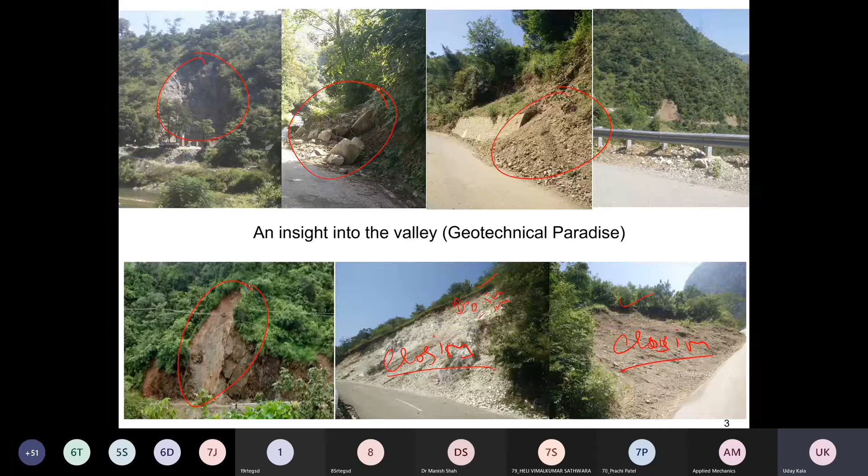So looking into the requirement of understanding all this, when we talk about landslides, it's typically defined as earth material moving down the slope, or moving out of the slope. Landslide is one of the disasters, and when you look into the disaster aspect, it claims life, and it also involves huge amounts of money spent only on managing landslides, not exactly mitigating them. As per the data we got from NIDM from 2016, there should be a new report coming out very soon.

So let us see if we have dealt with landslides better in the last 5 years or so.

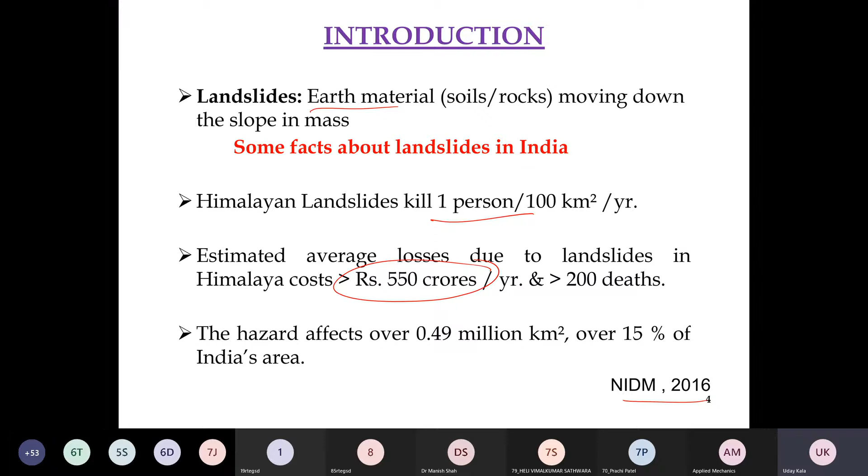When we look into landslide classification, as we were discussing, we need to look at the different types of material which is flowing out. It can be rock, debris, a combination of coarse grained soils, and sometimes, in a few countries worldwide, fine grained soils or clay type soils which tend to slide or come out of the soil mass.

Depending on the material, different movements are associated with it. Normally rock tends to have rock fall and topple, whereas debris type of soils are expected to slide, and in conditions of more water content or moisture, they may also have a small spread. Fine grained soils mostly tend to have these two types of flows: spread and flow.

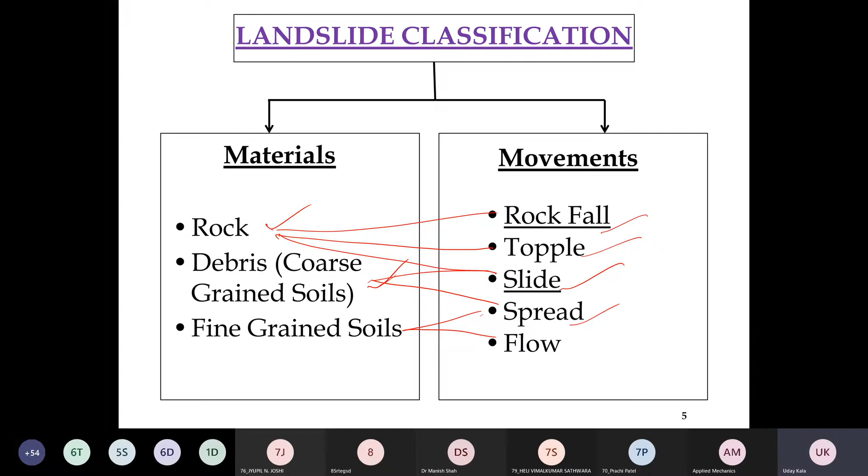So now we can understand that different types of material provide different types of movements. Based on these movements, we can understand what to expect from this particular disaster, which is termed as landslides. So when you look into the classification of material and movements, the major component that comes into this is something called risk mitigation.

Can we mitigate the problem of landslides? Yes, we can, and we have been doing it. What are the options we have? Number one is structural measures, where we construct a good amount of structures - I'll define this slightly later. And the second is non-structural measures.

Now what does this non-structural measures mean? Non-structural measures are like giving you a sort of warning, maybe slightly before the event.

If we don't talk exactly about landslide disaster risk reduction, but about flood disaster risk reduction, which has been wonderfully brought into practice by India's National Disaster Management Authority - when we talk about floods, it's very difficult to talk about structural mitigation corresponding to such disasters. However, there are a lot of non-structural measures which have been very evident, and we've seen good success case studies from 2018 in Orissa, 2019 in West Bengal, and also 2020 in West Bengal, showing a very good approach towards risk reduction in floods.

So what do you mean by non-structural measures? It is watching, observing, predicting, and then warning. Accordingly, we go for risk reduction methods such as moving people, where we don't involve any major structural intervention related to disaster risk reduction.

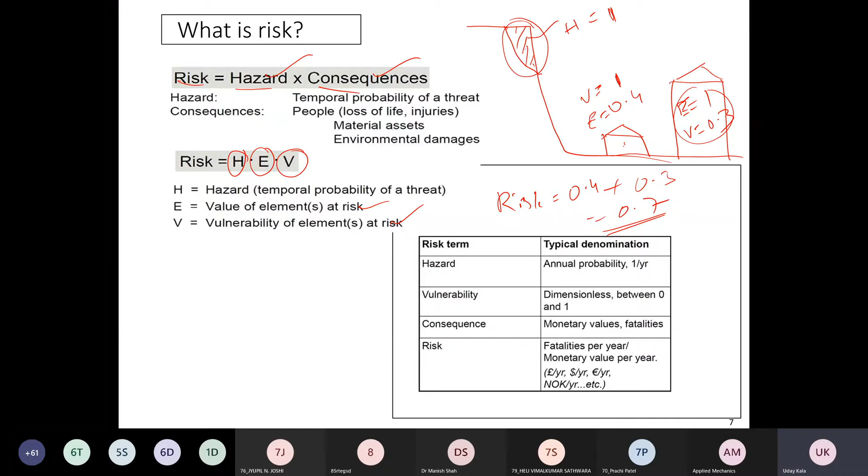For your information, the same risk approach is also used for looking into the current situation which is going on, COVID. In COVID also they do risk analysis and try to see how this risk can be mitigated, what is the vulnerability and what are the elements of value at risk. That's what you have probably been going through in the newspapers if you have been following them for almost a year now.

So when we look into the options we have in risk management, first you have to establish risk: what is the amount of risk we have in the process? Then we identify what the risk is. For example, I just told you there is a landslide happening and it is going to fall. Risk analysis, yes, we have done. We found there are 2 settlements and accordingly the risk is 0.7, from the earlier example. Now I'm going to evaluate the risk, how much of this 0.7 is going to be workable.

For example, if there is a rock or soil, what type of expectations can I have, and how can this risk be evaluated? If the small settlement is something like an industry, then the time of people being in this particular industry is time controlled. We are going to have a high amount of staff in the working hours, probably in the morning, whereas at night the number of people in this particular industry can be less.

Whereas it's going to be the reverse when we talk about a settlement or house accommodation with respect to the risk. So we evaluate what type of risk we are talking about, and then look into the options we have for risk treatment. When doing all this, the major parameters we require are monitoring, and communication and consultation: how to take into account risk identification and how the risk treatment will be done. Then again we establish a context for how the risk treatment is going to get done, and identify what can be the risk after the treatment.

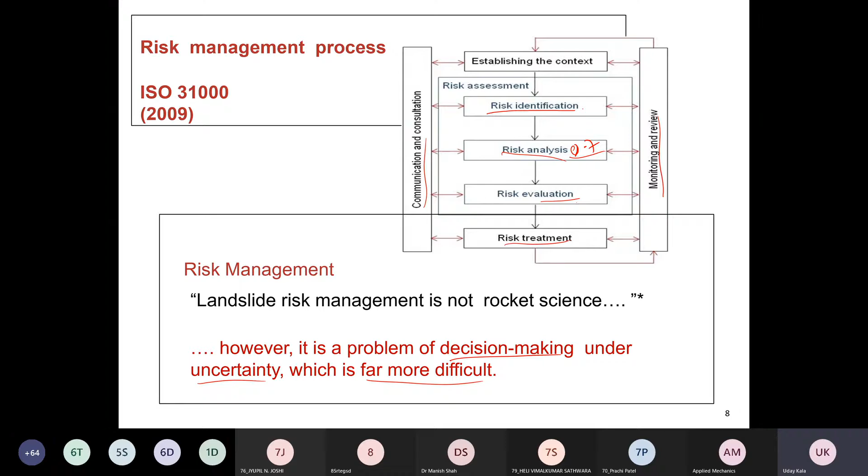It's not that if you construct a retaining wall, it's going to stop or control the situation at that particular point. Again, it will lead to another risk. So we do a cyclic assessment of risk, and try to understand how the decision can be made in terms of uncertainty, which is far more difficult. If you include more uncertainty, the problem is going to be higher. That's how we approach risk assessment or risk management associated with landslides here. As I told you, it can be used for any type of disaster, including earthquakes or the biological disaster currently going on, COVID.

Then the major factors we need to look out for in risk management are: first, what can cause harm, the problem associated with the hazard; then what is the probability, how often, the frequency of this problem; then if it happens, what can go wrong; how bad are the consequences; and what should be done. If you look into these 5 questions on COVID, I'm sure we have a lot of understanding.

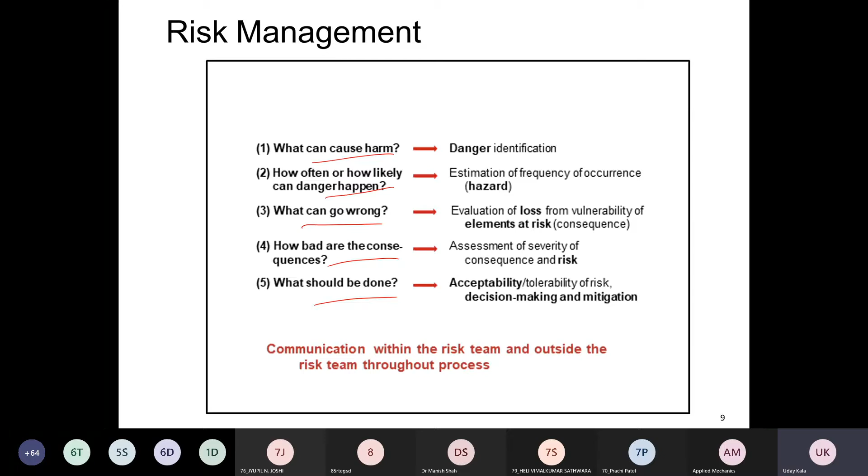Now, if I tell you that the structural mitigation for COVID is vaccination, till date we have been following non-structural mitigation: safe distancing, masks, sanitizing and so on. That's how we can differentiate structural and non-structural mitigation associated with any particular risk. Now, what are the various points again? How can we assess or quantify the risk? Then the question comes in. Yes, we have different types of methods by which we can compute the hazard.

I'm sure all of you should be doing different types of analysis. If you are coming from earthquake, if you are looking at some disaster landslides, or if you are looking for settlement of your buildings, etc., we have a huge number of works, equations, or methods by which we approach understanding the hazard.

So in this, there are heuristic methods which are mostly taken up by the local site, local problems or local information. Then statistical methods: we will try to find out different methods by which we will try to understand the data, the problems associated, or the numbers associated with the hazard, and we are going to go for some statistical analysis.

These days a lot of probabilistic methods are into the picture. I'm sure if you are looking into work published by most researchers, at least from India and other areas, especially in the lines of disaster, we talk more about reliability methods. And in reliability analysis we have different types of methods like first order second moment, first order reliability method, second order reliability method.

So we are going to have different types of methods by which we can understand the reliability, followed by another very common simulation, which is Monte Carlo simulation. Then depending upon the type of problems we have, either we go for point estimation or we go for event tree analysis for computation of different types of hazard.

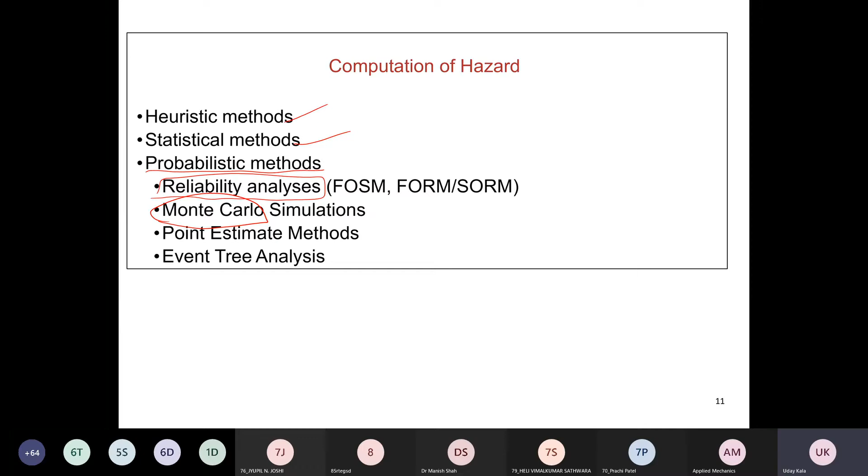And these methods which I'm listing out are more famous or more workable in landslide related problems. So it can differ with the different types of hazards or different types of problems you are looking at in your own areas.

Then qualitative risk analysis, as we have been discussing, is going to be simple. First, we are going to take a very typical understanding by using qualitative methods. So we are going to have different types of methods, either using a 4x4 matrix or 4x6 matrix or 7x7 matrix, or simply a 3x3 matrix, which I'll try to explain in the given time we have.

So when we talk about qualitative risk, as we told, risk is a combination of hazard and consequence. So I'm going to have two scales, hazard and consequence, because they are multiplied, hazard into consequence. We are going to divide the happening of a hazard and the consequence associated with it into three simple scales.

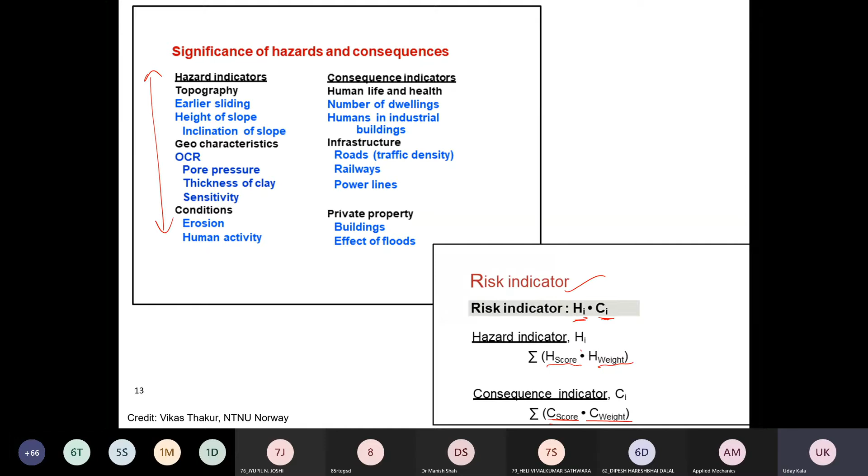So like this, we need to cut the concept of hazard and indicator into different factors. This particular case study comes from Norway, from one of my collaborators, Dr. Vikas Thakur. I took most of this data from him. So I'm just trying to give you a small idea about how they did this in Norway, in one of the regions, where we are going to talk a little about risk analysis.

For example, when I talk about the chance of an earlier landslide happening, I'll give a weightage of 1, because wherever landslides keep on happening, the chance of a landslide in that particular location can be comparatively low. So I don't give more weightage for it. But when I have a triggering factor like pore pressure, or if the area has been cut for any road or housing development, it is going to give a worsening effect. That is why I'm going for a high weightage.

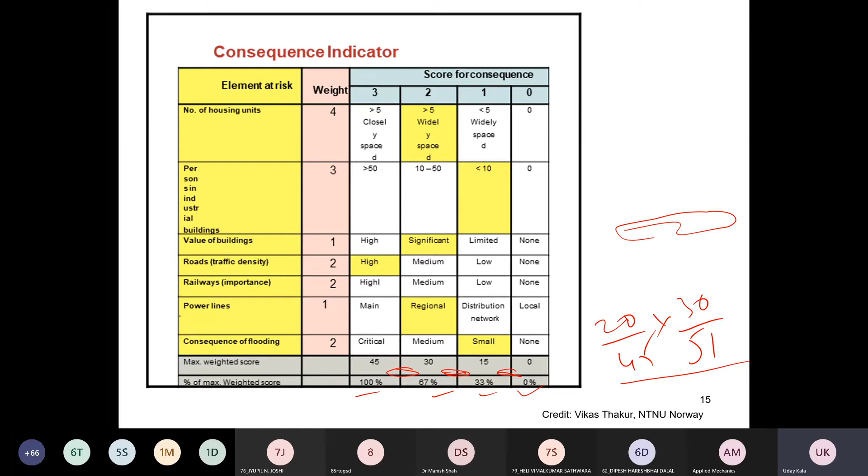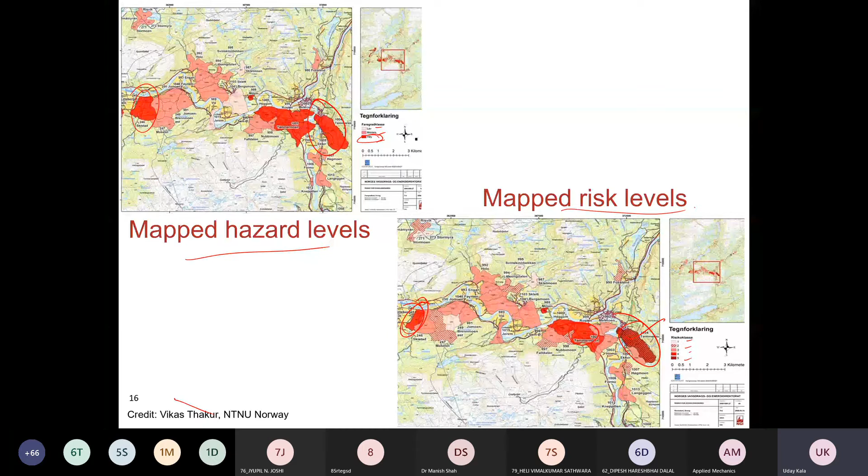So for example, I'll construct some retaining wall, or I'll try to go for some risk mitigation method, some structural method, and then I will try to make the people aware that there is a chance of a hazard happening here, and I will try to reduce the consequence associated with this particular problem. It can be done by using this.

The second is, okay, I will not go for any structural mitigation, but I will evacuate the total place, and I will reduce the risk by removing all the elements of risk, and I'll try to reduce the risk associated with the problem. For example, sorry, I don't have much space here. I'll just try to do the same here. I'll take the same problem we tried to solve.

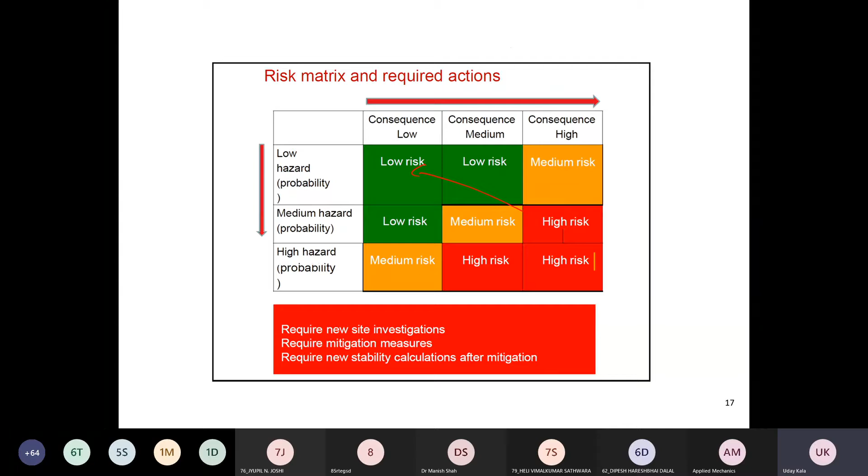Looking again at the risk mitigation aspects of this problem, as we discussed, we have structural measures and non-structural measures. I'll explain structural measures in the next slide, but let me talk about the non-structural measures. There are three different scales at which we can apply non-structural measures. The first is by having a regional threshold. For example, in a region we expect the rainfall to be constant, so if rainfall crosses a particular threshold, there is a good chance of a landslide in this area. Then I can give you the landslide rainfall approach.

In the second option, with zones, it's very difficult because a rainfall area is going to be huge. So when I want to come to a smaller extent, I will go for data-driven models, collecting data from the site to see the chance of hazard in this particular zone. I'll do hazard zonation, and this can be done using different data-driven models.

And lastly, for local measurement, if I have one particular site which is very dangerous or very prone to hazard, then I'll go for field scale monitoring, with monitoring methods developed or employed in that particular place. Whatever information we get from it, we use to monitor the slopes. All these aspects come under monitoring, and by using monitoring we approach a non-structural measure, so we are not going for any typical structural measures.

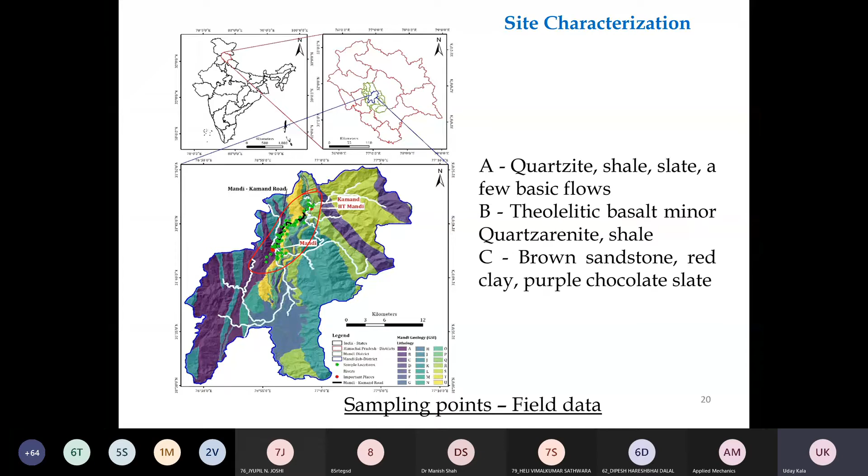What are the different types of geology in this particular area? From all the locations, we try to get all the geotechnical parameters, which we normally do in our lab on a day-to-day basis, including particle size distribution, gradation, general characteristics, and Atterberg limits.

Then I look at parameters such as saturated density, gamma, OMC (optimum moisture content), and saturated moisture content in the soils, which gives us an idea how the soil behaves with respect to saturation, because all the landslides happening in this location fall into the category called rainfall induced landslides, which happen more during the rainfall period. That is why moisture content plays a major important role here.

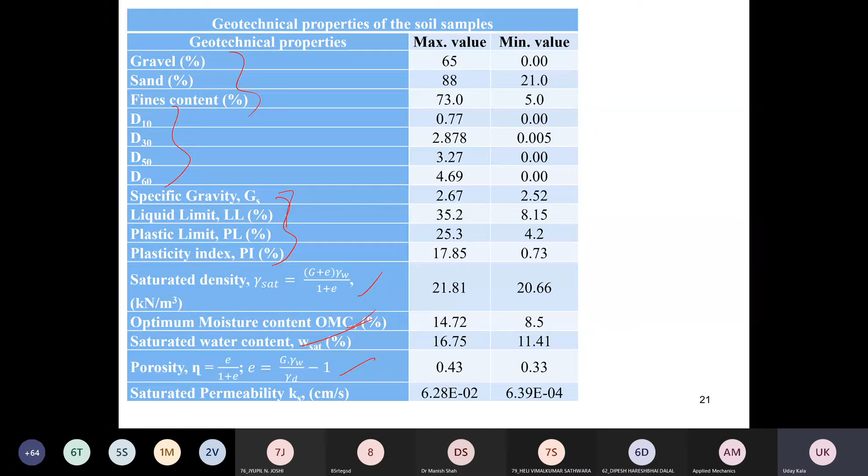Then there's the proportion of the soil, porosity, then permeability - how fast or how slow the water is moving in this particular zone, so that when there is rainfall, I know what to expect from this particular slope.

Apart from this, we also collected a lot of information from the field, which includes field moisture content, slope angle, elevation. Angle of internal friction and cohesion are not measured in the field, but we collected the data from the field and did the test in the lab, direct shear test, to get these values of cohesion and internal friction.

When we collected these parameters from 82 locations with 22 parameters, out of which in 2019 there were only 58 landslides and 24 no-landslide sites, it became very difficult to use any simple logistic or statistical method to get an understanding from such high-dimensional data - 82 locations and 22 parameters - to understand the intrinsic parameters.

That is why we tried to use machine learning here in order to understand what factors correspond to the failure of slopes in this particular area, which is Mandi.

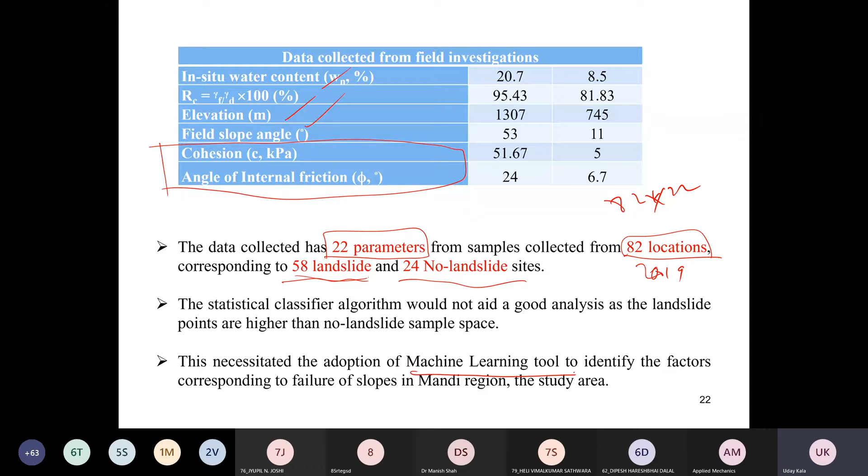For these failures, as I told you, we have both data - landslide and no-landslide locations from 82 locations - and from each location we collected all the information: geological, geotechnical and hydrogeotechnical parameters required for ascertaining what parameters indicate a slope failure.

For this we made a machine learning program in which we divided the factors into training and testing. Most of the time training goes to 70%, whereas testing goes to 30%, and then all this training goes through typical models existing in machine learning, or sometimes we may have to go for ensemble methods depending on the variations, or depending on whether it's a multivariate or univariate type of problem we are trying to solve.

Then we identify a technique, test it, and validate the method, and this validation can now include ranking of these parameters. Then we choose, based on the machine learning, what the various contributing factors are, out of the 22 we considered.

For example, if I take 22 parameters from here, after doing all this analysis, probably I can narrow it down to 5 or 6 parameters which are most contributing. These parameters can then give us a good idea about ascertaining the happening of a landslide in a location.

However, as we discussed, we have a lot of issues in understanding probability as well as errors associated with these particular problems, which we are also going to take care of as part of this analysis.

So for doing this, we use this type of analysis where we use TP, FP - true positive, false positive, true negative and false negative. Again, if you've been following news regarding COVID, you would have seen the same parameters used, how the reliability of testing can be checked using these particular parameters.

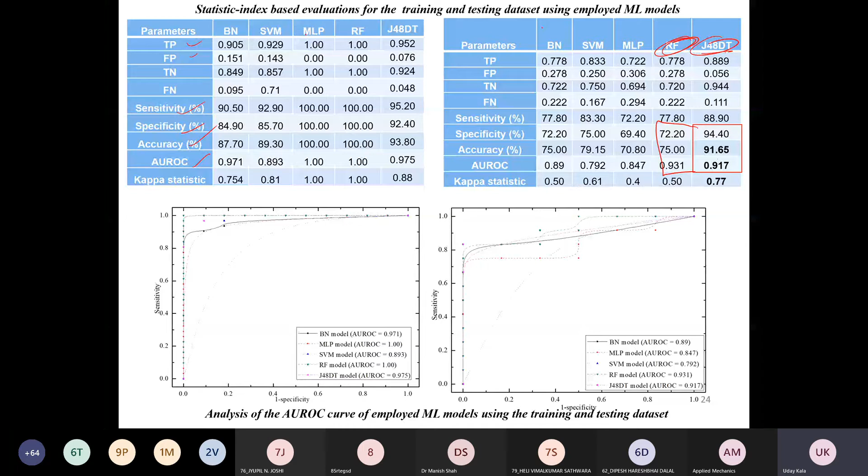So looking at this, we did the same grading analysis. We try to take all the parameters and classify them with respect to the landslide problem, where we have 58 landslide locations and 24 non-landslide locations. Based on this, we try to differentiate the problem with respect to different conditions, and we do something called correlation feature selection method. By using this analysis, we can find the ranking associated with each parameter on the happening of a failure.

We define the happening of a failure as 1 and a non-failure as 0, and we try to get the parameters and see what is the contribution of each parameter in order to get an outcome of either 1 or 0. So then we understood that relative compaction and porosity are giving us a good amount of correlation, whereas the other parameters - field moisture content, permeability and angle of internal friction - are giving us rank 1, 2, 3, 4, 5 comparatively.

So all the ranks, the serial numbers, can also be talked about as rank. The highest rank is obtained by relative compaction, followed by porosity, then field moisture content, permeability, and angle of internal friction. After this, the variation has been found to be very high, so we can say that the first 5 parameters are among the most important or most indicating parameters.

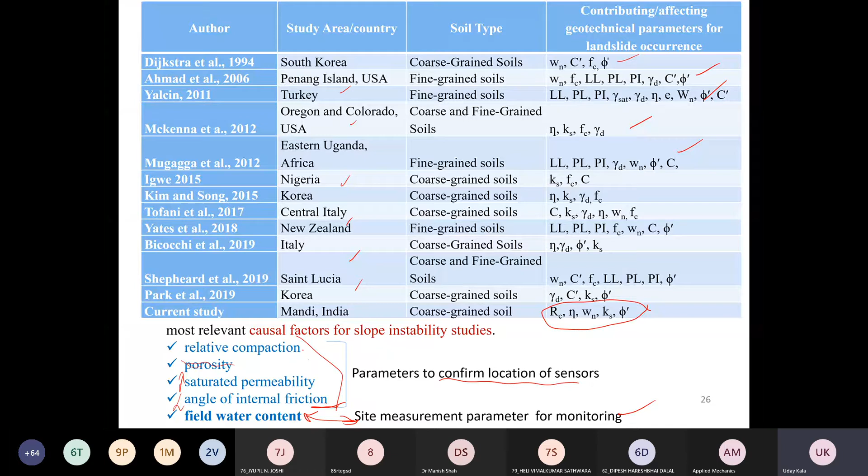So based on this, we can develop a method. Sorry, just a minute. I'm sorry, there is a landline call, so I cannot stop it. Sorry for the break, continuing on the same.

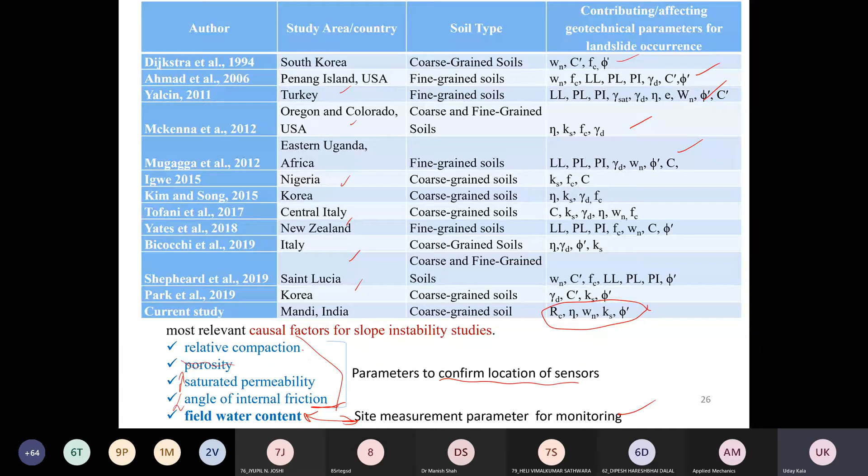So we fixed these particular parameters, and then we went ahead. Now the major point we needed for measuring or doing the monitoring, we could understand from this particular study by using machine learning.

This is the same slide we talked about. When we looked into this, we came to the point that soil moisture is one of the major components which we need to measure at the particular location for understanding the susceptibility of landslides.

As I told you, all these landslides happened majorly during rainfall due to the intensity of rainfall. So we have our own rain gauge, as part of our sensing, which is also MEMS based.

Apart from this, we have to confirm, because at a point of time when we call it a landslide, the first parameter or the first definition itself says we need to talk about a movement which is happening in this particular location, measured like an accelerometer.

And then we are going to have a force sensor, which is going to talk about impending moisture increasing in the soil after a particular level.

Then we are going to also include environment parameters, like temperature, humidity, and light sensor, which are going to give us an idea about what can be expected after a particular rainfall incident in that location.

And as we can see, we collect all the information and try to load it into a cloud, based on a GSM module. So you can see a combination of all this.

Few of these, for example light sensors, accelerometer sensor, and GSM - these are the same things which we have lifted up from the smartphone. Also the force sensor, which you also have in the screen, most screens.

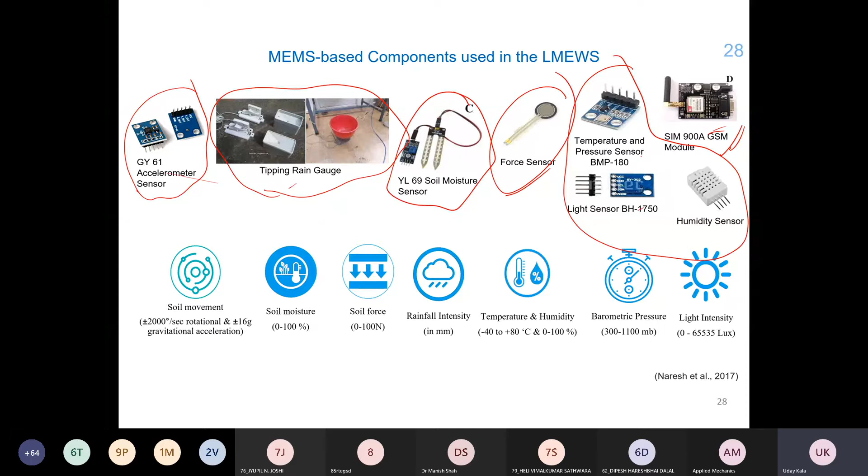But however, it is not very sure that when you select this method and these components, they are going to work. So what we did initially was go for some training of these particular sensors. We needed to train them for different understanding.

For example, this is the setup used for training the moisture content by using soil moisture sensors. We packed all the soil in a particular box, then tried to place all our sensors, and lifted the ramp so that the soil slides.

And when the soil is sliding, we observed that most of our accelerometers, which give us values of displacement, started giving us some information initially. So we understood that most of these particular sensors we are taking up are trying to give us an idea about a movement happening inside a small box.

Which looks something like this - you can see a lot of wires and monitoring happening inside our area when we are trying to do the same with the soil, which we are trying to move as part of this particular experiment.

And this experiment and the combination of these parameters - we immediately filed a patent somewhere in 2018. This patent is currently under examination, and we are expecting this to come through soon.

However, the way the sensors work and the various parameters we are trying to judge as part of this whole exercise is already published. I'll share with you the list of publications at the end of this work.

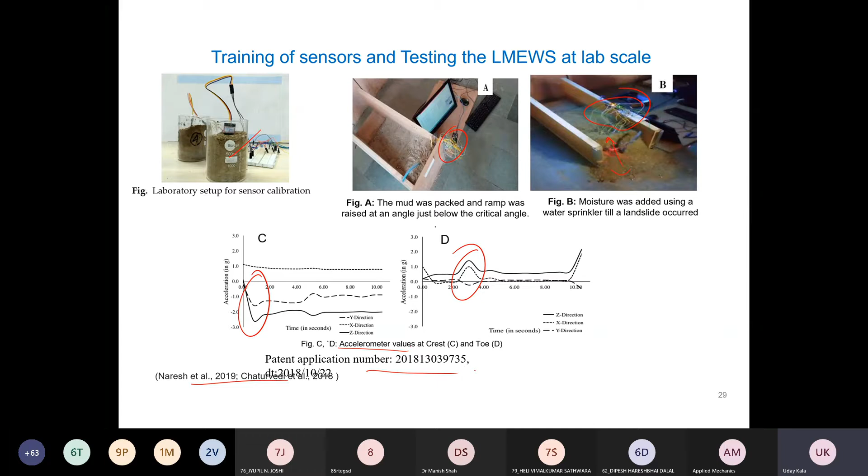So if at all you want to take up how to do all this calibration and testing of these particular parameters, then we have accelerometer. So this accelerometer is the same again which you have in your mobile, which helps you to find the direction as well as the movement.

For example, when you are probably looking into taxi related apps like Ola or Uber, they tell you how far your driver is and which way you are moving, whether their movement is going fine, or whether you are moving in the same direction of where you have to reach. The same thing happens in your Google Maps, or if you use any tracking device. So we use the same sensor.

So for that, the major component is here. As we are getting accelerations, we want to convert it into displacement as well as velocity. We know single integration of acceleration gives us velocity and double integration gives us displacement. So we used a time scale. This is the amount of time, that is 1 millisecond. 1 millisecond is the time which is used for getting the data from the accelerometer.

So we take the same time interval and we calculate the displacement from the formula ut plus half at square. That is the kinematic equation, and the time period here, as I told you, will be limited to 1 millisecond, and accordingly we will get the displacement corresponding to the value of accelerations which the sensor is noting over the time.

Okay, then based on these displacements, we are going to stack up the displacements, and then we are going to calculate the z-score depending on the amount of displacement happening and the mean and standard deviation of these movements over the time. And this we do across all three directions, that is x, y, and z. Depending on these movements, we look into the z-score, and these movements are classified into small, medium, and large.

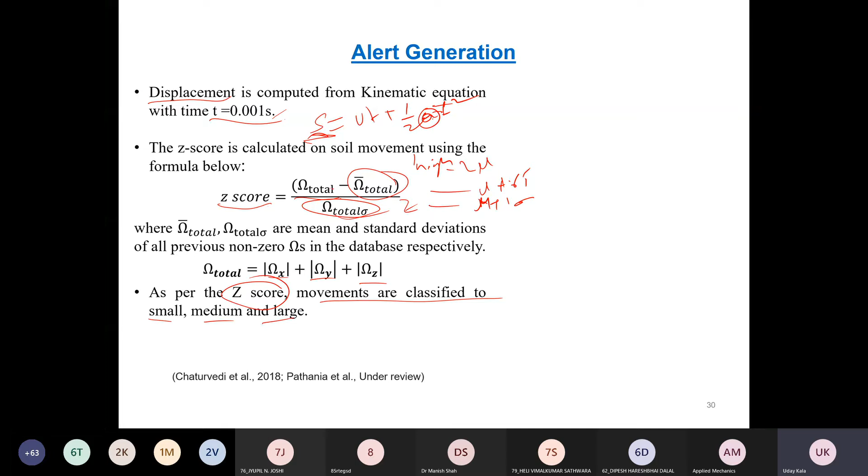So we give an interval: when the z-score is near to 1, mu plus 1 sigma, then we call it low. Mu plus 1.65 sigma, we call it medium. And when it talks about 2 mu, then we talk about this being very high. So we try to classify these movements, and then depending on the movements, we can raise alerts, which look something like this. You can see data collected over a period of about 1 hour.

So there are small movements happening over the time, and they keep accumulating. If they continue, they are going to slowly breach one level after the other which we have kept, and these movements at a particular location, Balianala 2, are going to convert into moderate movements. Similarly, the moderate movements keep happening over the time, and they again try to convert into high.

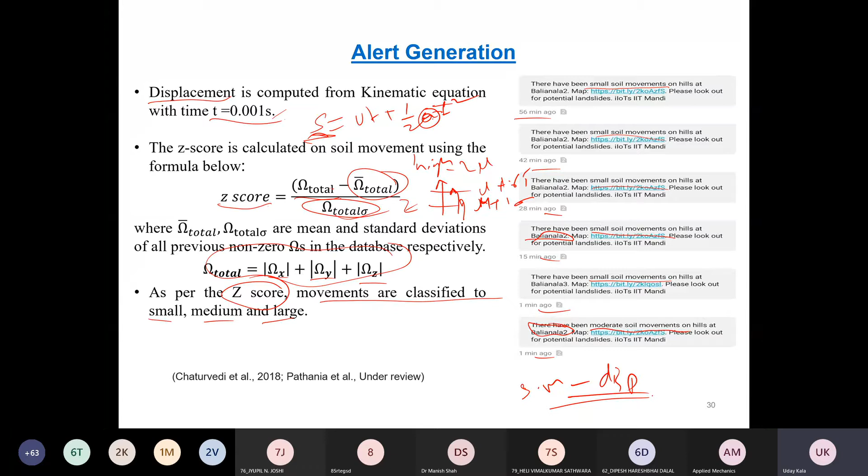Now, when the rainfall is stopped, then depending on the ambient temperature and heat conditions, the soil again gets dried and the moisture falls, and slowly we can see the movements also keep decreasing. So we have been maintaining the data on soil moisture and displacement over the time. Now we are seeing how these values on soil moisture and displacement can be useful for thresholding for a given slide or movement happening in the soil.

And this keeps on happening every 10 minutes, in which we are collecting the data from various locations where the sensors are already placed. So we have again filed a patent on this particular framework, and the same has been extended to an international patent. Again, both the patents are in the examination stage. We are expecting them to be granted soon.

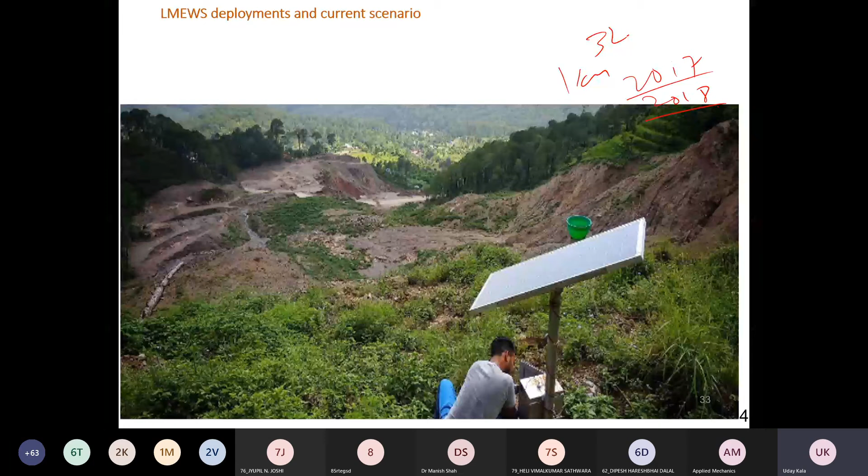After 2017, we have been working on this area. As I told you, in 2018 we started having our work going on properly. We also filed patents, so we could show some initial success of our sensors to the district administration, and we could take this opportunity of going to this slide. Normally, when a slide happens, in the coming rainfall there will be subsequent slides in this location. So we got permission from the district administration, and we installed our sensors at the given locations to check if there is any movement happening in this place.

So our sensor box, from the white boxes I showed you, has now become more formal, looking like this, where all our units are present inside, whereas the sensors which are needed, like the soil moisture sensor and acceleration sensors, are all present inside this particular box, and our rain gauge is on the extended stem, and all our sensors are powered by solar panels, which look something like this.

So our sensors currently are at the surface location, so our sensors go only 1 foot or half a meter deep into the soil. Currently we have started doing subsurface monitoring.

Currently we are restricting our work only to the top soil, or the surface level of the soil, because in a landslide, whenever there is a mass landslide happening, there is a good chance that the surface slides similarly with the point at which the slide is also happening, or the surface displacements are comparatively higher than the displacements happening exactly at the failure zone.

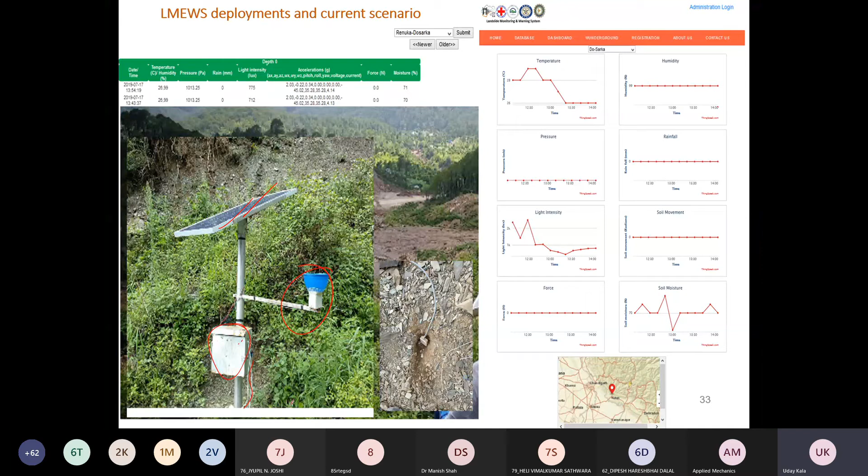Okay, so our data is captured. I just showed you a glimpse of how the data looks, and you can also get the same data in graphic scale, where you can understand the difference happening at the site location. Based on this, we have developed a landslide monitoring system, and along with the system, we have also connected it to an alarm system very near to the road by which this slide was passing.

This system is now very low cost because of the MEMS sensors we are using, hardly costing a few thousand rupees, whereas the total technology, including the solar panel and all, comes to 50,000 to 60,000 rupees, depending on the type of parameters we are trying to estimate at a given location. Whereas the conventional systems, like a tilt meter or an extensometer, cost you somewhere in lakhs and crores of rupees.

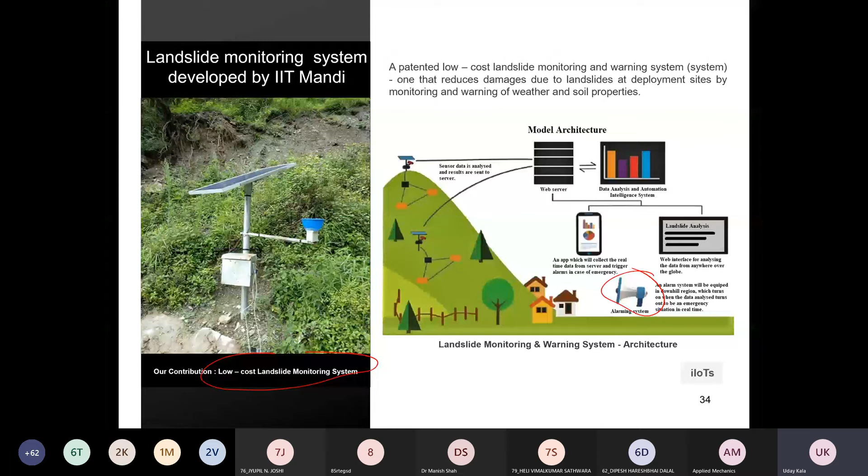So that's a major development we made, and all our work is patented, and we can give you data monitoring, or we can give you all the data in real time. We also have alarming poles, a warning pole at the slide, where we monitor the slide using wireless communications, and we are going to have hooters and blinkers at the alarm system at the site in order to control any movement of vehicles on that particular road. We are also going to give movement alerts based on the type of measurements we have.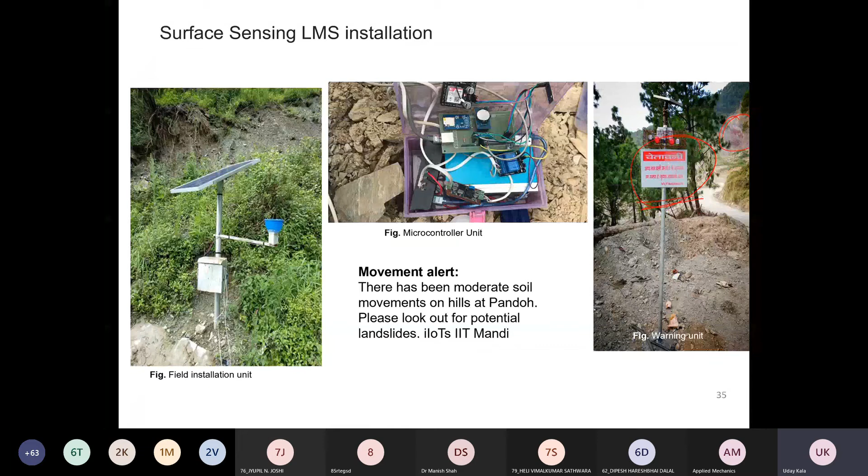Our solution has major benefits: we are collecting all the data from the sites, so we can also provide rainfall alerts the way you would get them from weather.com. And because we are doing machine learning, we can also do predictive analysis. I'll show you that toward the end of this slide. Apart from that, we also give you movement alerts. If there is any movement happening in this particular area, we can raise an alert about the chance of a movement much ahead of time.

All our units are cloud monitored or cloud integrated, where all of you can also look into the site and get the values corresponding to the particular location. And of course, we are measuring a lot of weather parameters, so we can also give you weather alerts, whether there is a chance of high rainfall, low rainfall, or what type of weather you can expect, because of the data we are getting directly at the site.

So based on these locations, which, as I told you, we have been working on since 2018 with the interest of the district administration here, we have started collecting soil displacement data over 2 months when it rains, from almost 5 stations. Earlier I talked about training and testing. Again, we do the same training and testing. We split the data into 80% and 20%.

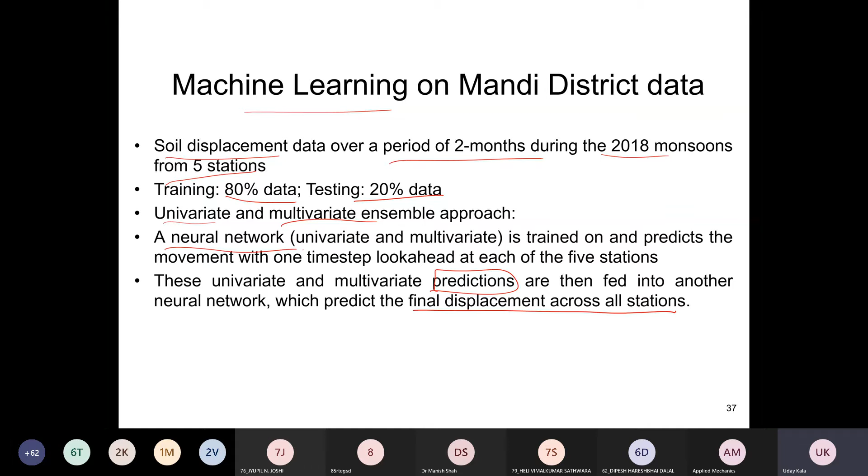Now I'm talking about the machine learning I'm doing for predicting the soil displacement at a particular location. In this, we use univariate and multivariate ensemble methods and a neural network, which can be used to predict the movement one time step ahead at each location we get data from. These predictions can be done on a time-to-time scale depending on the range of movements we have.

This is the prediction which we did somewhere in 2018, whereas we kept on collecting a lot of information, a lot of data from the site for all of this particular time, and we could get down on the errors. Now we are very much in control. Our training, forget about training, our testing is now giving us an error of almost 2 to 2.5%, and we have now gone into a scale of 1 week predictions depending on, again, different types of ensemble models which we try to use in machine learning.

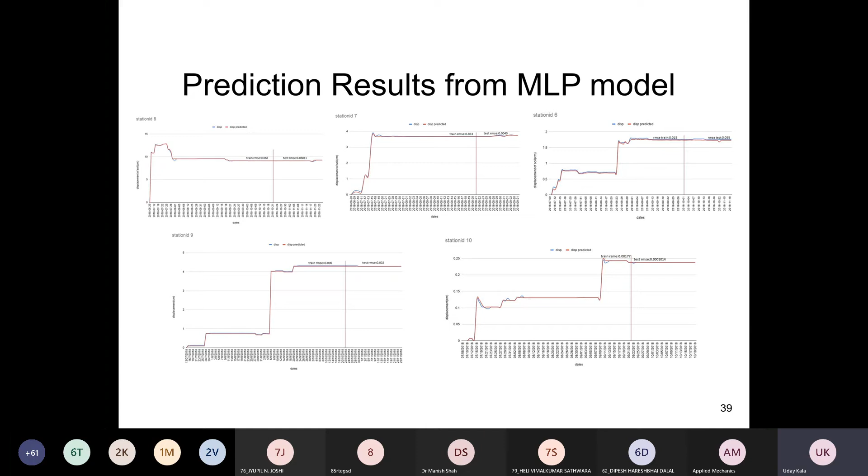So depending on which we are now trying to give different alerts from different locations based on the happening of a movement. Currently we are in the scale of movement. We cannot say that these particular movements can add up to a landslide. However, if we are able to predict the happening of a movement, then the prediction of the same being converted into a landslide is also possible. But of course, we need a lot of data sets and a lot of time to understand such a thing happening.

However, in the initial phase in 2018, we started monitoring that particular location where the houses were susceptible to a slide which was happening just beside their vicinity. So we placed our sensors and monitored, and on the 27th of July 2018, our sensors started giving us information on the possible happening of a slide. We started our monitoring somewhere here, so that is why the data peaks. But after almost 1 month, we went on understanding the movement in this particular location.

So on these particular movements we alerted, and the traffic was stopped, and late at night, somewhere around 2 o'clock in the morning, there was a huge slide in the same location in 2018, and this averted a major disaster because of our sensors, and this has been confirmed by our district administration, the IIT Mandi sensors.

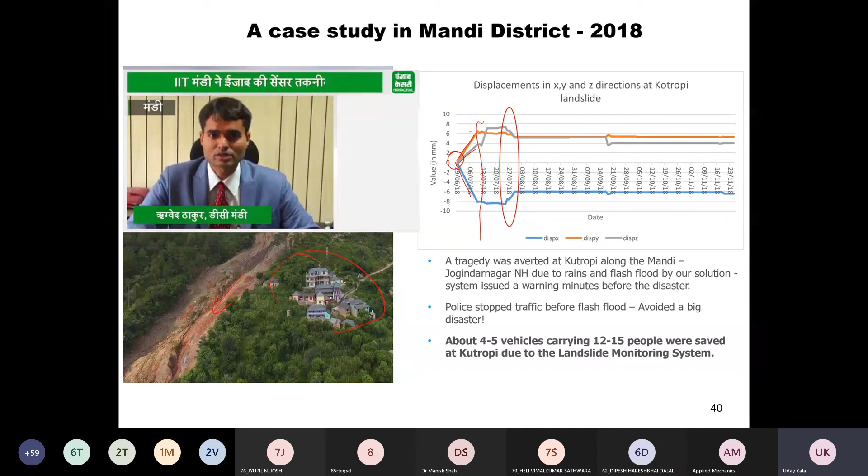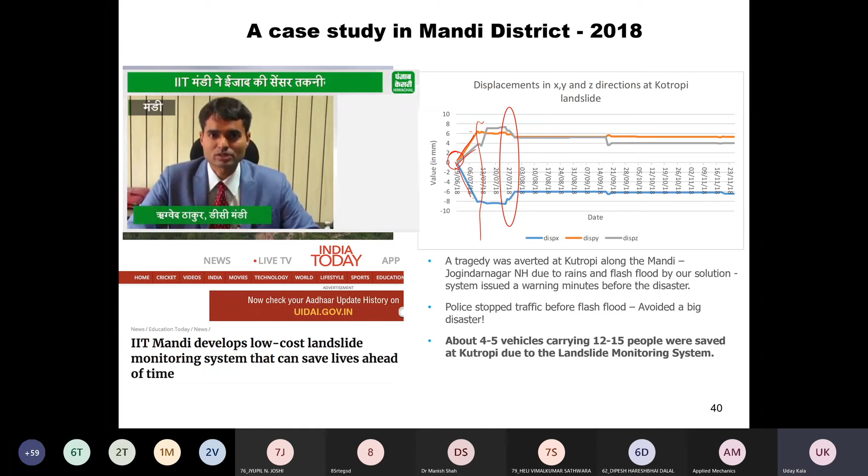Okay, I don't want to really play this video, but just to give you an idea, this person is the deputy commissioner of our district Mandi, who has confirmed that our sensors gave them early warning and they could avert a major disaster. Let me not show you the video. After the declaration by the district administration, we were covered in a lot of news, including BBC. And now, with the system getting more and more focus and more and more success, we are approached by various organizations, including Indian Railways.

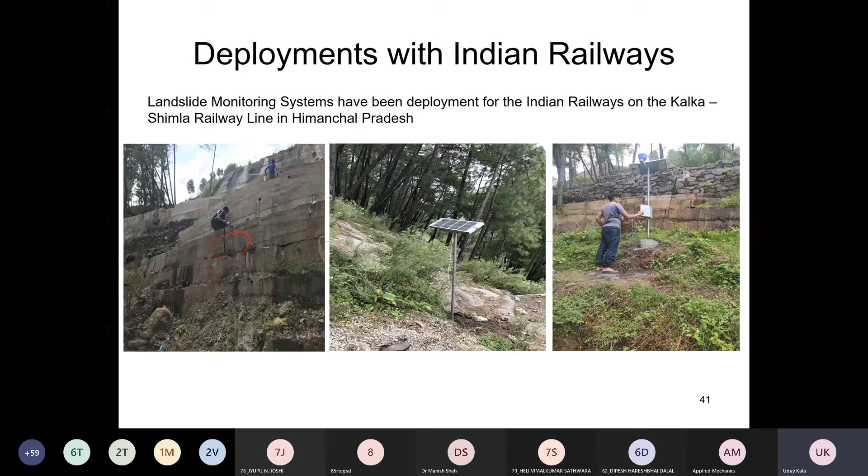We have recently deployed our monitoring sensors not only for landslides, but we have also started looking into structural monitoring, mostly of retaining walls, which are developing cracks because of increasing moisture behind these walls, which were probably not constructed properly. As you can see, there are not a good number of weep holes, which can cause these retaining walls to fail, especially in terms of the tension and the cracks in this location. So we have started looking into various aspects, not only soil, but we are monitoring retaining walls at these locations.

And now we are in talks with Indian Railways again to go for some pilot scale testing in Goa, at Padi Tunnel. I'm sure if you have traveled in this area of Konkan Railways, you go through a lot of hills, and all these hills are landslide prone, and there are a lot of issues raised by KRCL, Konkan Railway Corporation Limited. So we are in talks with them to go for a pilot scale and accept the challenge of monitoring the slides.

And apart from this, because we are also active on publishing in international journals, especially IEEE, we have been contacted by TfL, that is Transport for London Underground Metro, where they want to go for a particular slide which is dormant over time. So we started talking at the start of 2020. However, because of the ongoing COVID situation, we are unable to go for a visit and try to understand their requirement. However, mostly by the end of this year, we are hopeful that we are going to go for at least one deployment location in this particular area in London.

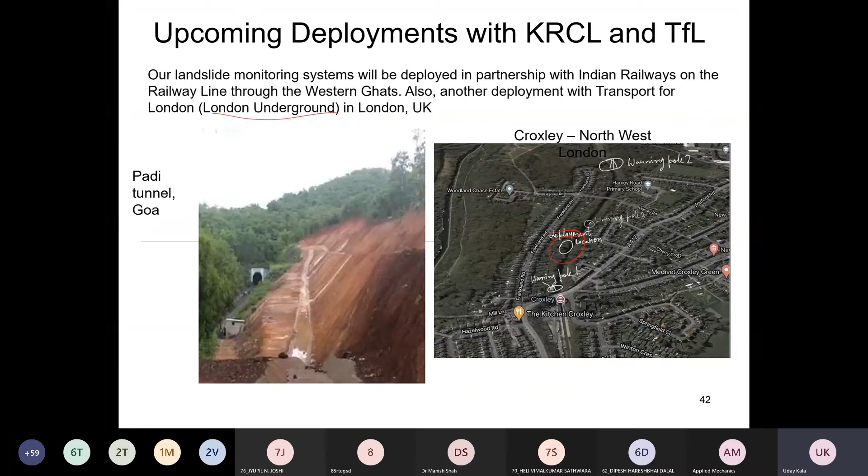So this particular technology, which started from IIT Mandi, has now gone into commercial scale because of the awards and because of a lot of focus which has been given because of the representation which was done by the district of Mandi as well as the state of Himachal Pradesh. And now we also have a lot of patents and publications. I think I forgot to update this particular slide. We now have 5 patents and more than 10 publications in this particular area, especially in major journals like IEEE.

And of course, this particular work is impossible to be done by any single engineer or a civil engineer. It includes a part of research which is done by Varun Dutt from computer science, myself from School of Engineering in Geotechnical Engineering, and my scholars from Geotechnical Engineering, Computer Science and Electrical have been of major importance for us in this setup and developing this technology, including the machine learning part, both for identifying the hazard as well as predicting the movements happening in the soil for impending slides.

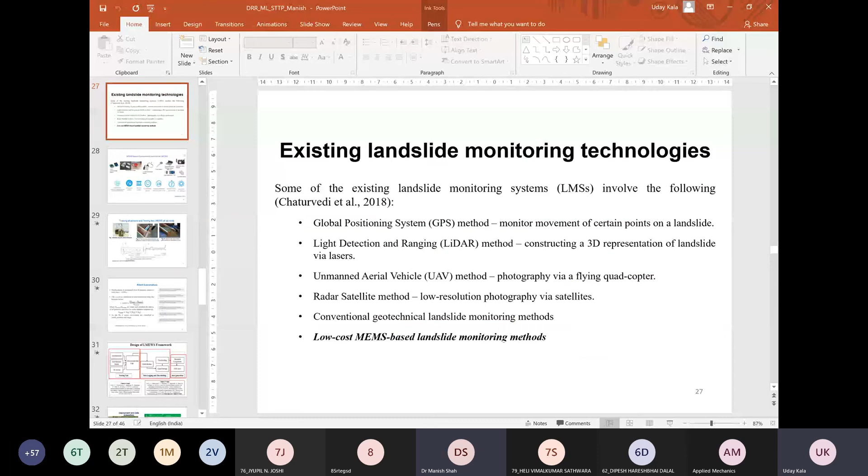The first question is from Preeti Mishra, where she is asking, how do we decide the magnitude of weightage, that is 1, 2 or 3, for a particular parameter? So you are talking about this, right? Is the slide visible? Yes, sir. So sorry, Preeti, probably there was some misunderstanding. I'm not saying that the rating is 1. The rating comes out as a parameter when you do this particular correlation coefficient method.

So there is a particular method. You can go into the literature and search for this correlation coefficient method. There are different coefficient methods. It can be Pearson coefficient, correlation coefficient, regression coefficient. Now you have to look into which particular parameter can be of use to you, and this factor is going to give you the weightage of each parameter. And depending on the weightage, we have gone for ranking of the parameters. So the 1, 2, 3, 4 we have given as ranking based on the weightages from the correlation coefficient. I hope it has answered your query.

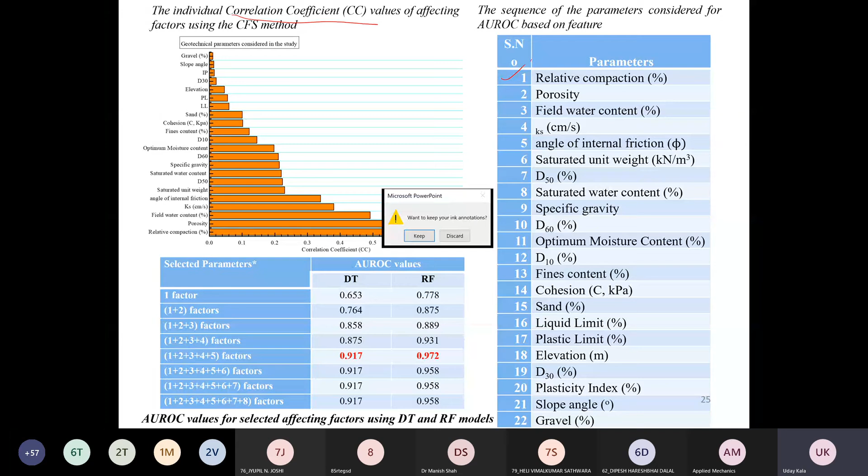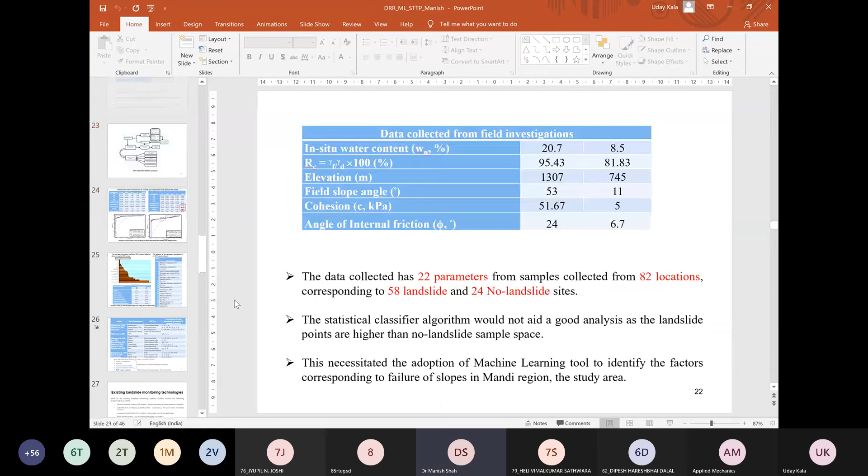Sir, one question with respect to the hazard indicator. In your initial slides, there were 4 scales, 0, 1, 2, and 3. I wanted to know how you are fixing the minimum or maximum value of this scale, on which basis you are fixing this scale. Okay, good question. I could not cover this quickly. Thank you again for the question.

So typically, if you have done any course on rock related aspects, I'm sure we know a parameter which is called RMR, rock mass rating, if you have ever calculated it. So we have typically taken the same concept which has been used here. So these particular values are, for example, when I talk about the height of the slope.

Okay, so you can understand height is a major parameter. If you look into any of the formulas, especially for landslides, the soil parameters C and phi, slope parameter alpha, and the next important parameter is H.

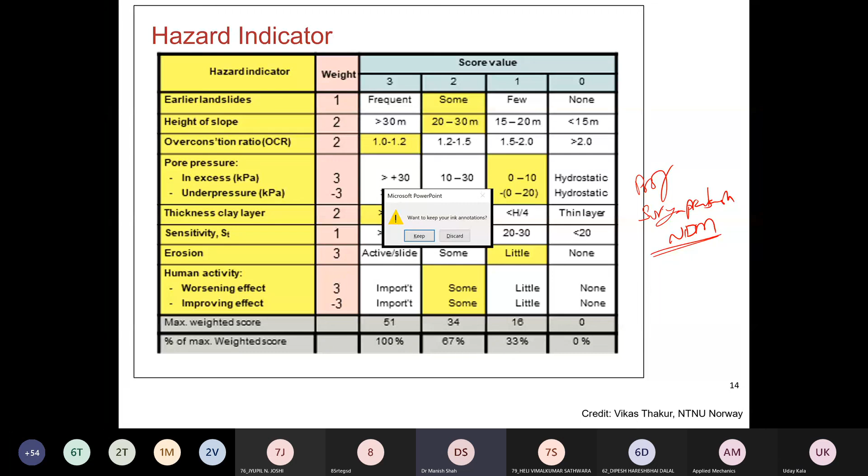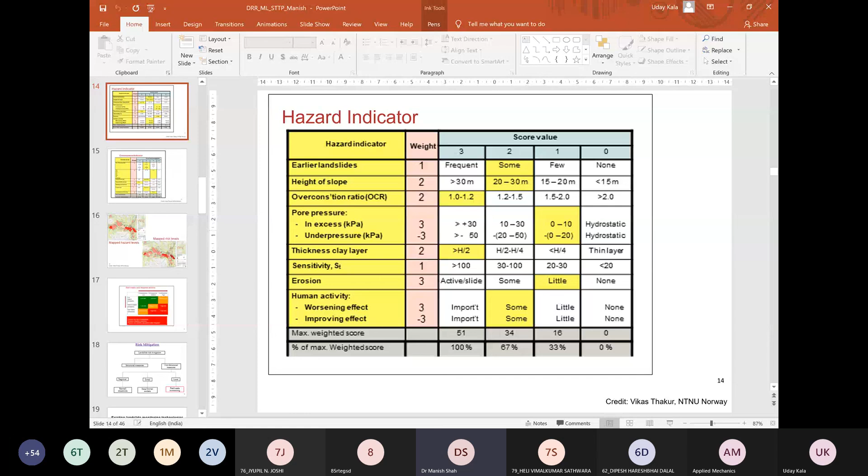Sir, another question: in your instrumentation part, where you used sophisticated instruments to monitor displacements and other things, measured with respect to time also—I wanted to know, I won't use the word similar, but have you prepared any predictive model from such measurements?

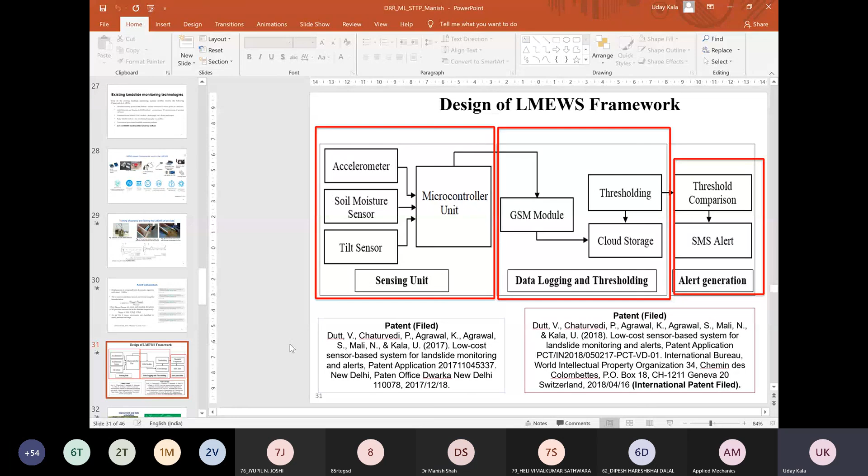Yeah, all the models which I showed you towards the end were done only from our data. But if the properties are nearly similar, or the conditions are similar, then this predictive model can work.

No, see, this particular model comes out only from the data we collect from the site, and these predictions do not include any soil parameter directly. These are simple statistical or data models of machine learning. We are not using any probabilistic models or theoretical models that we normally use in soil mechanics.

It is not, what should I say, an FEM analysis or a predictive analysis using Plaxis or FLAC or something like that—we don't use any of that. We only use data as input for our model. We are now developing models for how this data indicates deformation in the soil; that is currently in process.

So we're trying to correlate it. We are also trying to see, for all this data where it is happening, I also have soil moisture content, and I want to see that at a particular moisture, this soil has given so much displacement. Whether this displacement is continuous—whenever I get a certain moisture I get the same displacement—or whether it's controlled by other parameters in the soil, we're trying to understand that differently from this data.

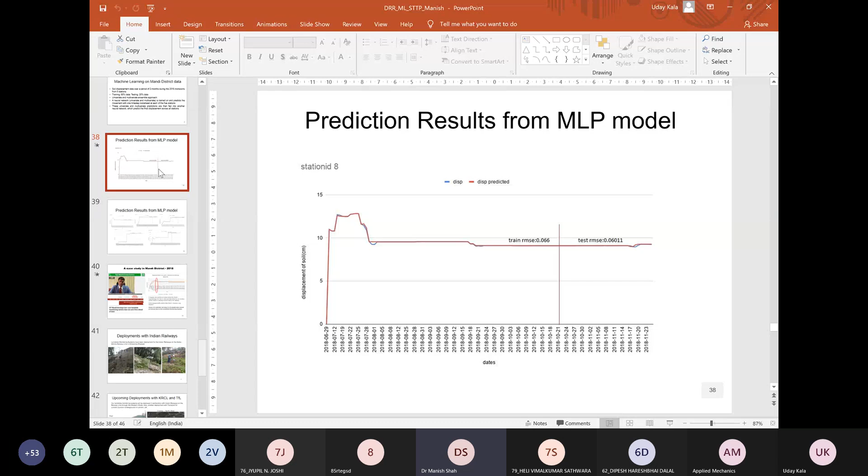Okay, thank you. So, any other questions from participants? Okay, there are no questions. So thank you, sir, thank you very much for your excellent presentation.